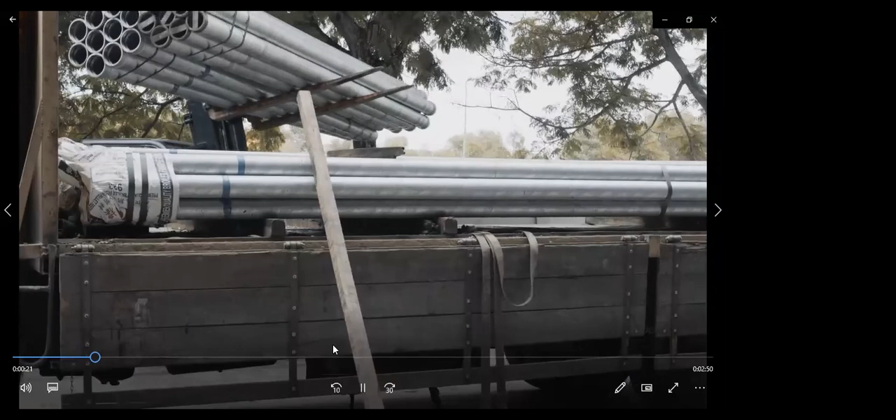As the world advances forward, standards have been rising as more sophisticated buildings are being developed. That is why we dedicate ourselves all these years to ensure that those high standards are met while providing only the best to our stakeholders here at Syarikat Logam Unitrade Sdn Bhd.

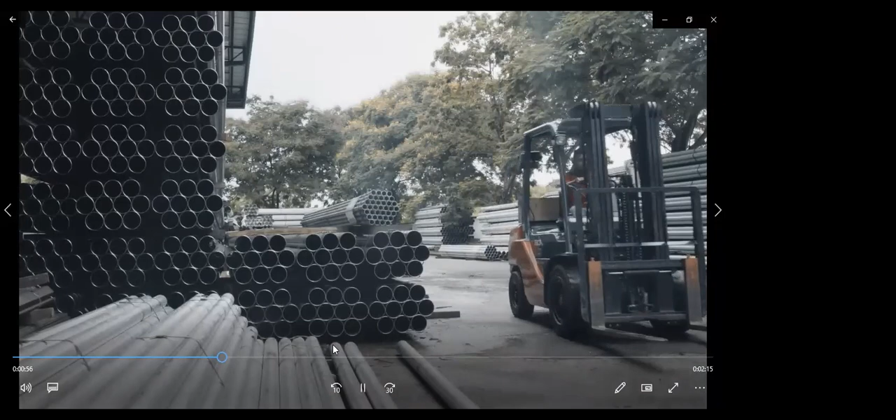Established in 1978, Syarikat Unitrade was founded by Sim Keng Cho, which later incorporated to Syarikat Logam Unitrade Sdn Bhd in 1984 as a major distributor, stockist, importer and exporter of pipes, fittings, valves, accessories, and building materials. With 40 years of hard work and dedication, the company has grown from a humble store at Jalan Ipoh to a 1-acre warehouse at Glenmarie in 1995, and now a 5-acre warehouse at Bukit Jelutong, Shah Alam today.

This would all not be possible without the endless support from our loyal customers. With the wide range of products we offer, Syarikat Logam Unitrade Sdn Bhd is now a one-stop solution center for our customers in construction, plumbing, fire protection, air conditioning, and more.

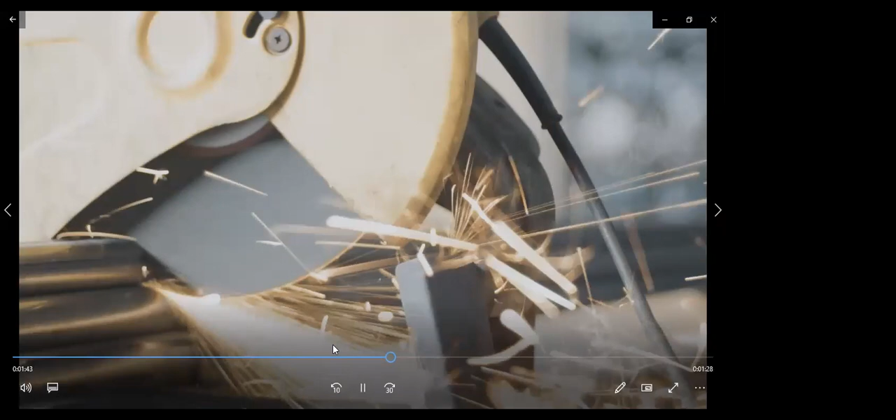To deliver confidence and reliability, we source and supply only the best quality products that meet the high standards of the industry in order to satisfy the high demands of our customers. Over the years, the materials we've supplied were used in some of today's most recognizable landmarks in the country, including KLCC, KLIA and KLIA2, Legoland, Vivacity Megamall, KL118, and many more.

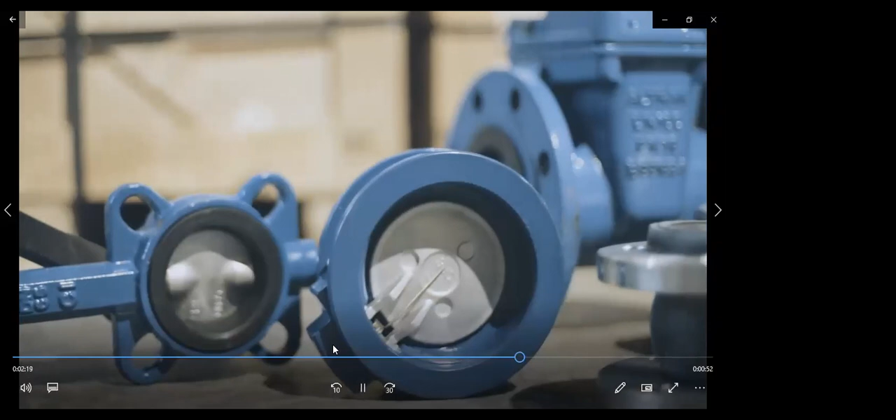Inspired to become the market leader, we have developed our range of products branded as Alfront. These products are registered both in Malaysia and China, and it is well accepted nationwide for its quality and reliability. In our inventory, we also stock and distribute some of the most renowned brands from around the world to our customers.

By combining dedication and commitment with high-quality products, the company aims to strengthen its presence nationwide and expand its reach internationally. Moving forward, we will continue to treat our customers with integrity and to provide endless support and reliability to ensure that possibilities are infinite with us at Syarikat Logam Unitrade Sdn Bhd.

Thank you, Ruben. Sorry for the minor mistakes. This is introduction to modern tech. Sorry about that. Okay, let me just get back to the screen.

Okay, I will come back to you on the website introduction again. Okay, where am I? Can you see me? Hello? Yes, yes, yes, yes.

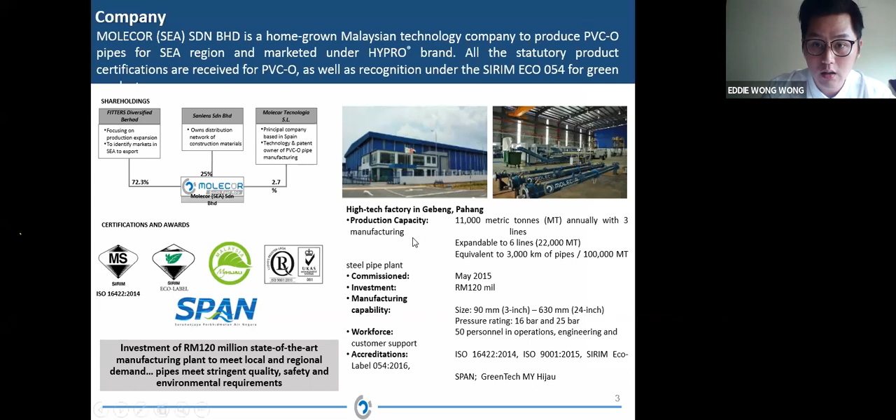As you can see, we have received awards over the years. Especially, we won the gold award during the 3rd Asian Plastic Award 2018 in the category of construction product. Besides that, we also received the SIRIM EcoLabel, MyHIJAU, SPAN, and also the ISO 9001 certification.

Here is something I'd like to emphasize, this green technology product. Molecor Southeast Asia received the MyHIJAU product mark in 2018, followed by the SIRIM EcoLabel 054 in the same year. So we have endorsement of HYPRO PVC-O as a green product, supporting the Government Green Procurement (GGP) to achieve its 20% target.

We also give the opportunity for users to take part in the Green Building Index and Green Tech Incentive, which benefits our developers and asset owners. At the moment, we are the only manufacturer to have received this MyHIJAU EcoLabel mark.

For our company project reference, Molecor has a very strong track record for infrastructure projects for piping applications in water reticulation, irrigation, wastewater and sewerage in both Malaysia and internationally. We have a total installed length of 800 kilometers in the Malaysian market, and we are actively participating in projects in Johor, Kelantan, and Negeri Sembilan.

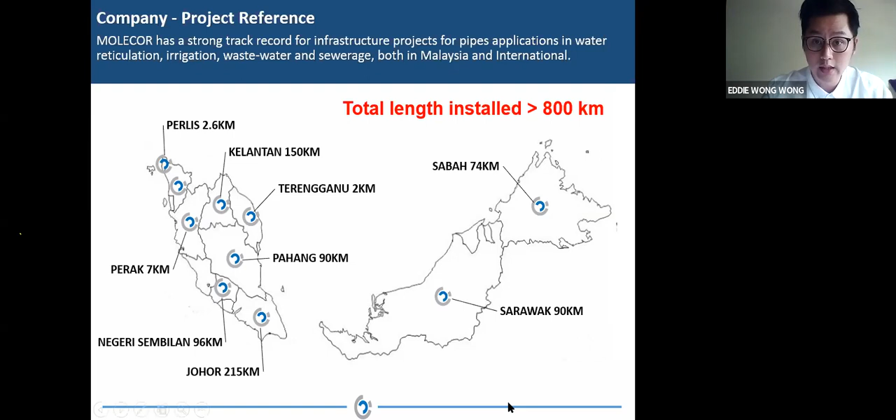For the international side, we have exported this pipe for irrigation applications to Papua New Guinea and also for housing development. So it's not only in the Malaysian market, but also in the international market, the Southeast Asia region.

This is a short video to introduce and give some idea of how our molecular orientation technology process works.

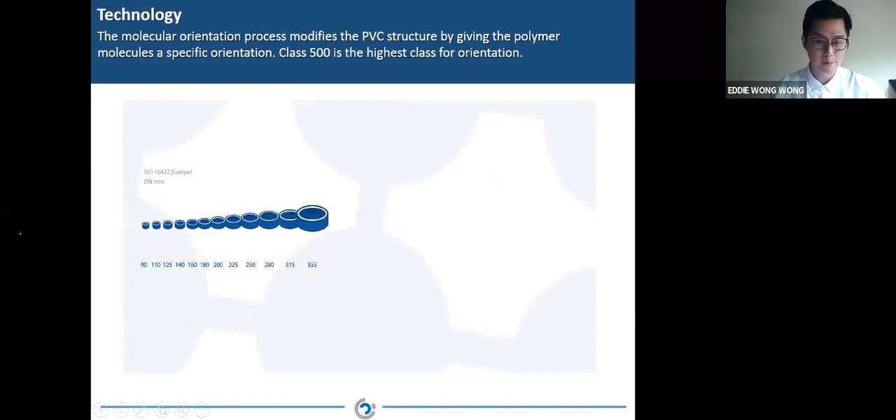Molecor has developed an exclusive technology that allows manufacturing oriented PVC pipes class 500, the highest, from DN 90mm to DN 800mm. This technology is based on the physical process of molecular orientation, which greatly enhances the PVC's physical and mechanical properties while maintaining the original polymer advantages.

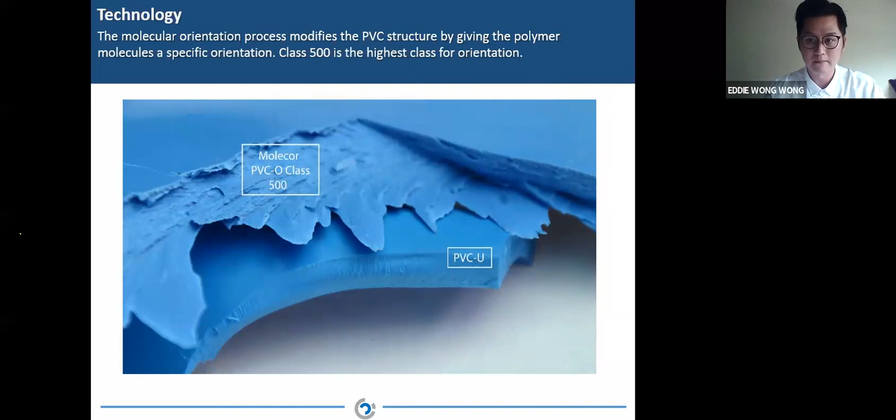When stretching PVC under certain conditions of pressure, temperature and speed, the polymer molecules are aligned from an amorphous molecular structure into the same direction as the stretching, resulting in a laminar structure. Molecor's technology enables orientation in both the hoop and axial directions, obtaining complementary benefits and improved characteristics.

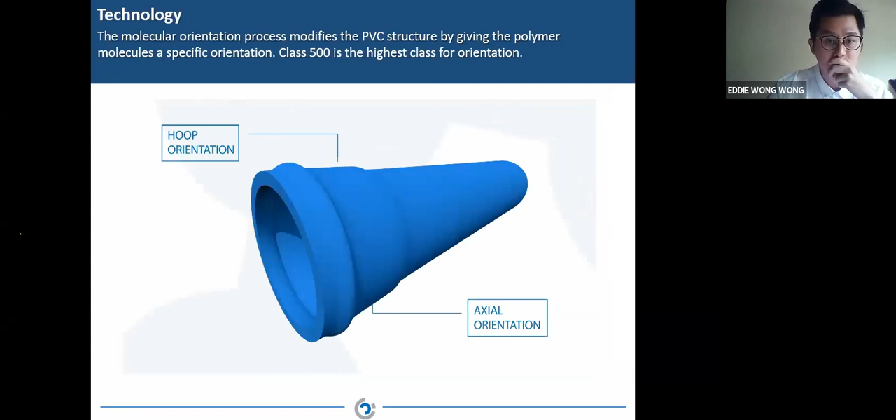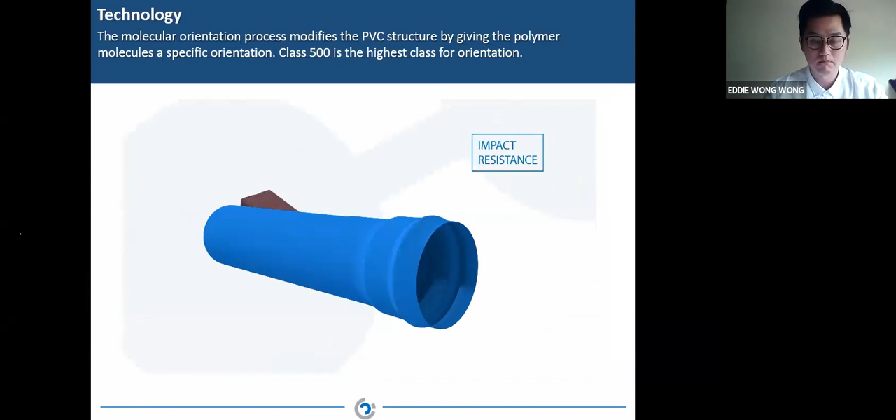We find higher hydrostatic resistance, excellent response to water hammer, unbeatable impact resistance, maximum flexibility, corrosion resistance, and increased hydraulic capacity. Besides, the pipe is highly energy efficient and environmentally friendly because of the ease of installation and the considerable savings in raw material compared to other plastic solutions.

Besides all this, the Molecor technology is a fully dry system, which means safety for workers. It is also stable, automated, flexible, and with a very distinguishing feature: the socket can be manufactured at the same time as the pipe and with the same characteristics and properties. This means that no extra machinery is needed to manufacture the socket.

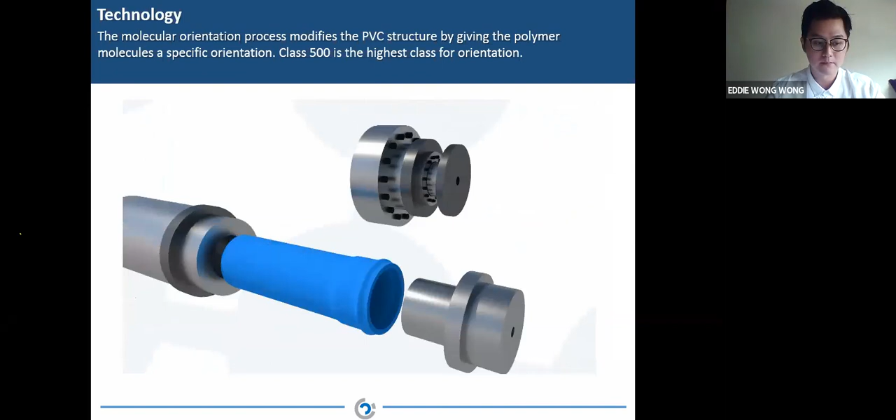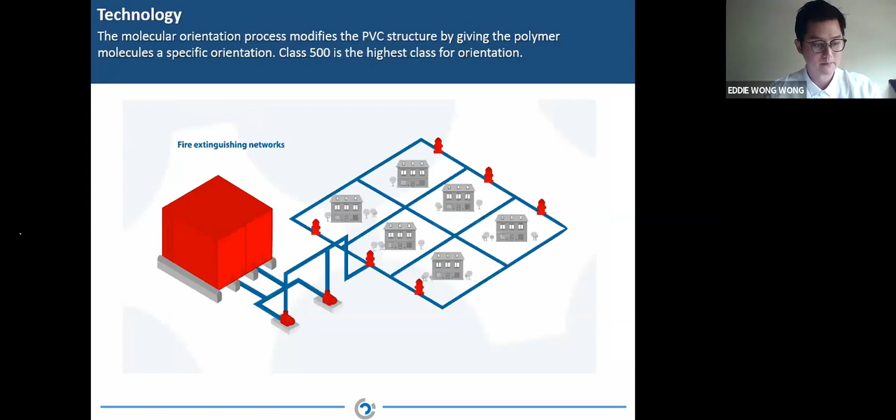The best solution for medium and high pressure water networks, irrigation systems, potable water supply, fire extinguishing networks, and pumping systems, among other uses. Molecor, orienting the future.

Here's a little recap explaining how it actually works. With our molecular orientation process, it helps to modify the PVC structure into a layer structure. As you can see from the picture, the molecular bond is randomly layered for PVC-U. After going through this molecular orientation process, it helps redirect the orientation and become a defined layer structure, transforming a random structure into a layer structure.

The picture below also shows that PVC-O pipes are layered inside, different from traditional PVC-U. This also helps enhance crack propagation resistance. So whenever external damage impact occurs, it will not go straight through into the inner pipe — it will stop layer by layer.

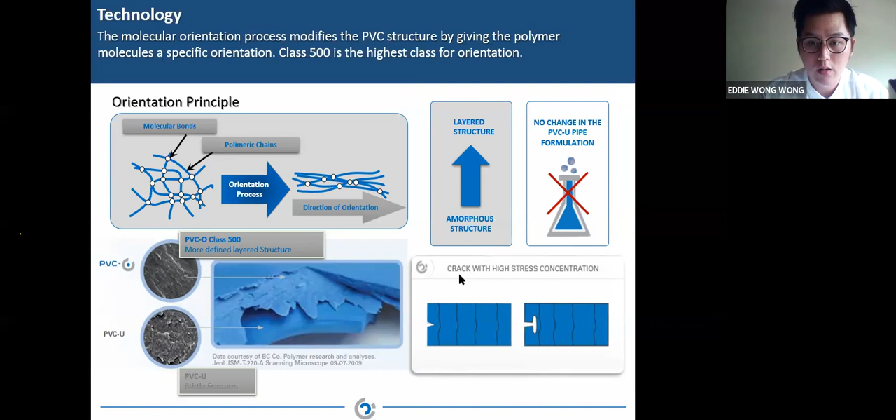With this technology, the result of PVC molecular orientation is stunning. It helps PVC-O achieve an enhanced level of impact resistance compared with PVC-U and PVC-M. As you can see, the level of impact resistance is the highest for PVC-O, level 5. Not only impact resistance, but also elasticity, strength (MRS) in both long term and short term, and modulus also show significant improvement compared with other polymer pipes.

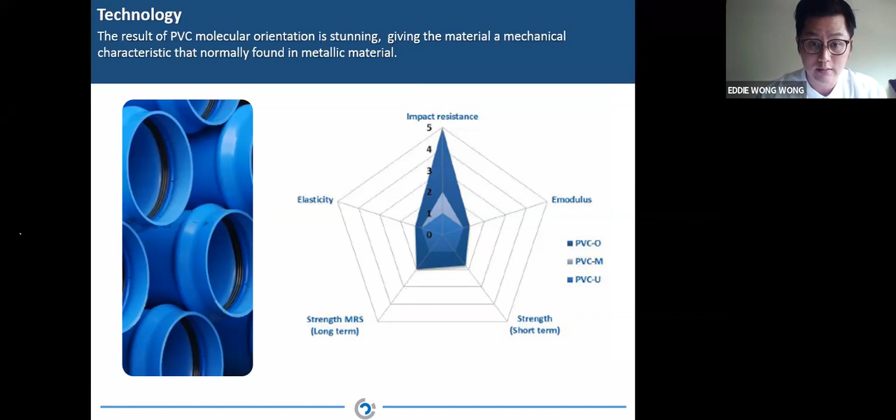PVC-O material is actually not a strange material worldwide. For example, in Australia there are 3 big manufacturers of PVC-O material. Although they use different technology, PVC-O is growing worldwide as a material for water solutions.

We produce 630mm sizes locally, and for any sizes above that we import from our technology partner, Molecor Spain, when producing at 16 bar and 25 bar pressure ratings.

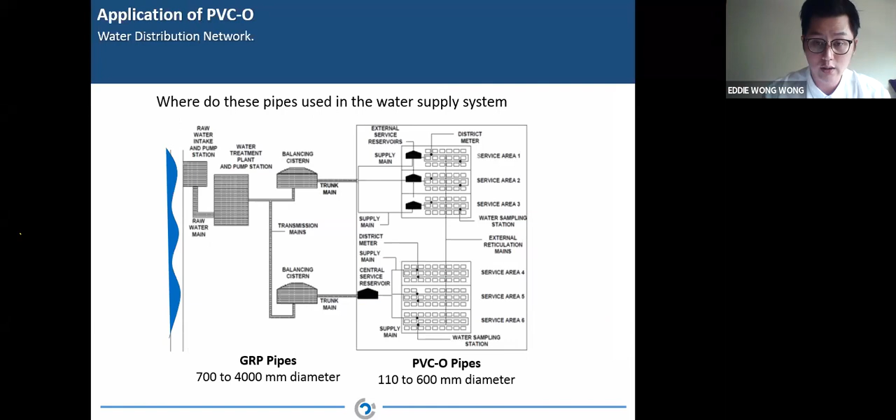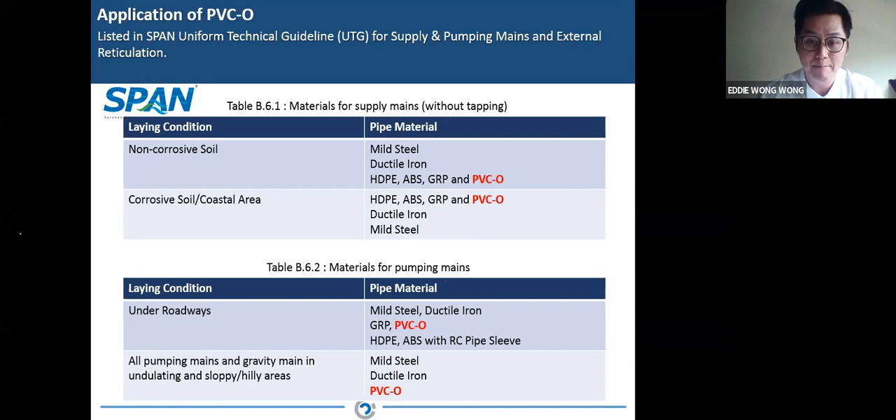In table B6.2, PVC-O material is also approved under roadway conditions with no RC pipe sleeve needed. Table B6.3 is for external reticulation pipeline material. As you can see, PVC-O is still recognized as approved material for all laying conditions, and under roadway no RC pipe sleeve is needed.

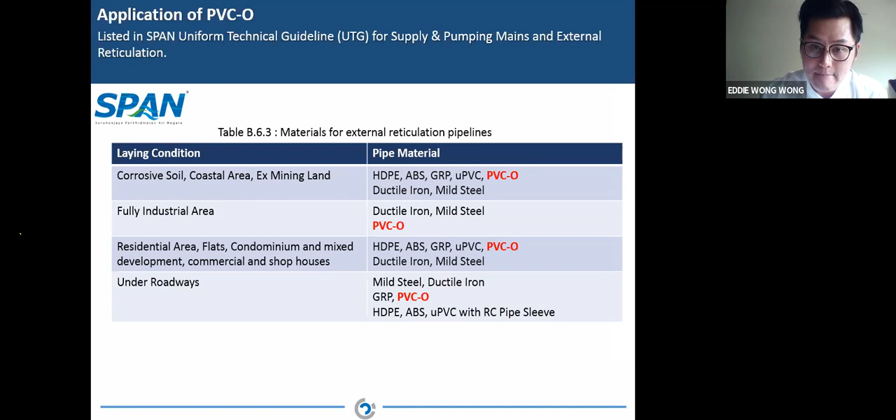There are a few points I would like to emphasize with PVC-O material - a few propositions I would like to talk about. First is the superior mechanical properties.

With this orientation process, it also helps enhance the level of extreme impact resistance and high resistance to external point load. I will show in the video later how extreme the impact resistance is, and also the high resistance to external point load.

Second point, the hydraulic performance. A good pipe should transport the maximum amount of water with the lowest energy consumption. With this molecular orientation process, the benefits are highly significant in terms of hydraulic capacity, using the lowest energy consumption to transport water.

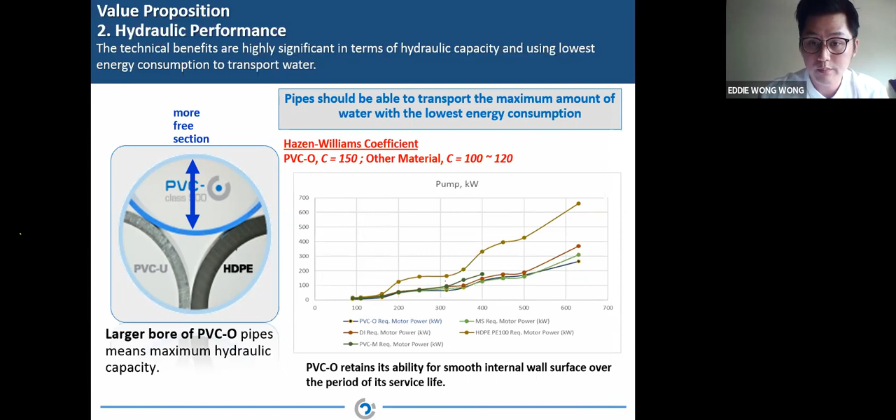The third part will be the long-term performance. As we all know, PVC-O is designed for up to 50 years of design life.

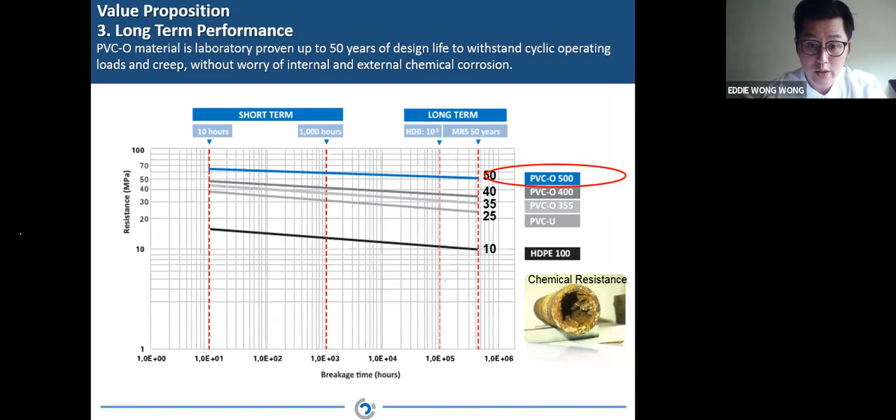With this chemical resistance - as you can see from the picture, a pipe without this chemical resistance, this will happen in a few years' time. When this happens, it costs you in maintenance and maybe pipe replacement, and increases your pumping water energy, and so on. In a further video, I will talk more about this chemical resistance.

The next point will be enhanced sustainability. During raw material extraction and production until the end of usage, we use less raw material, and all our material is lead-free and mercury-free.

During production we use less energy, and during installation it's easier for workers because of our single joint - so much easier - and with the lighter weight of the pipes, there's also cost saving on heavy machinery, so you don't have to rent heavy machinery.

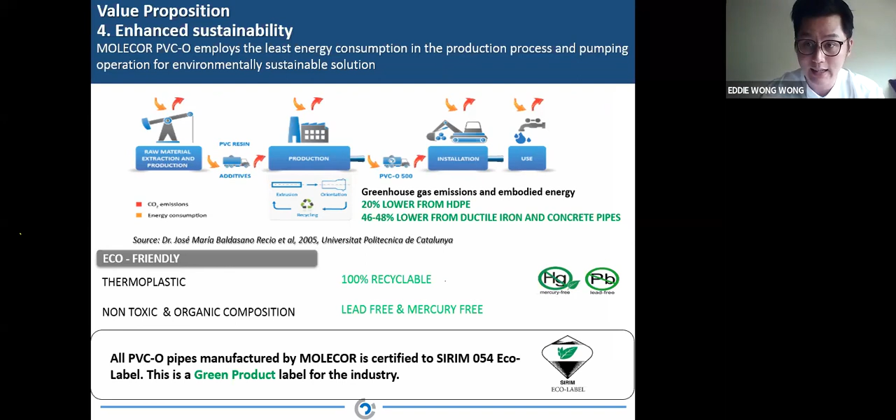Our raw material is 100% recyclable, and being lead-free and mercury-free helps - PVC-O pipe manufactured by Molecor is certified with the SIRIM 054 Eco-Label. We are the only pipe manufacturer that has received this green product label in the industry at the moment. Still, we are the only one.

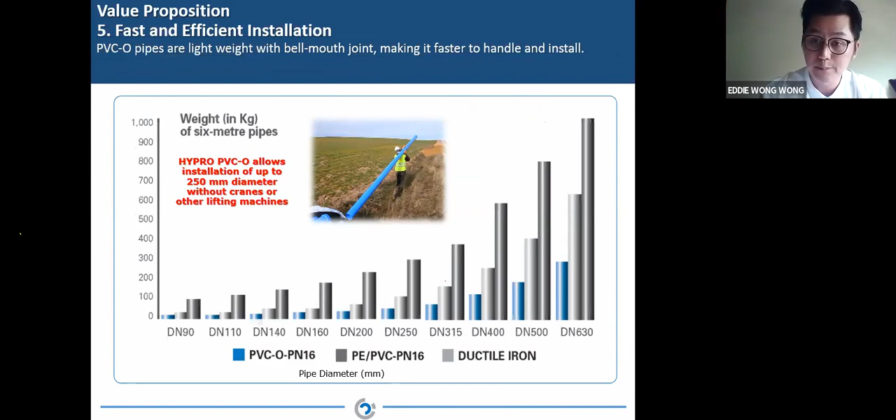So it helps save time and also save cost. This is a short video to show the installation and how it actually looks, recorded in Kuala Ketil.

So first we do trench preparations.

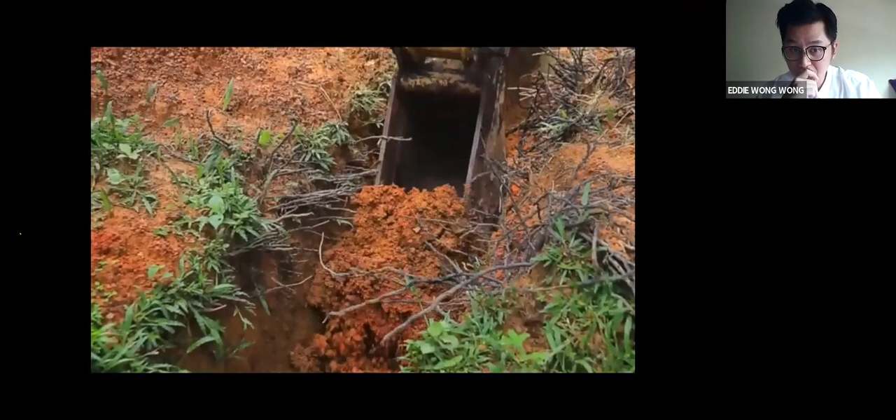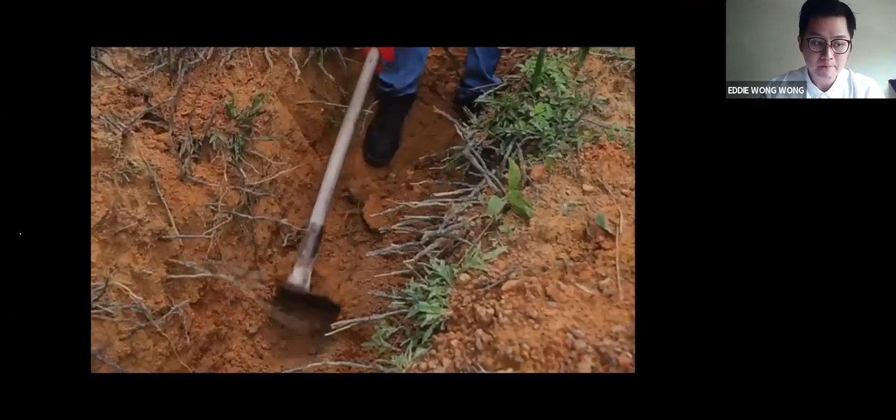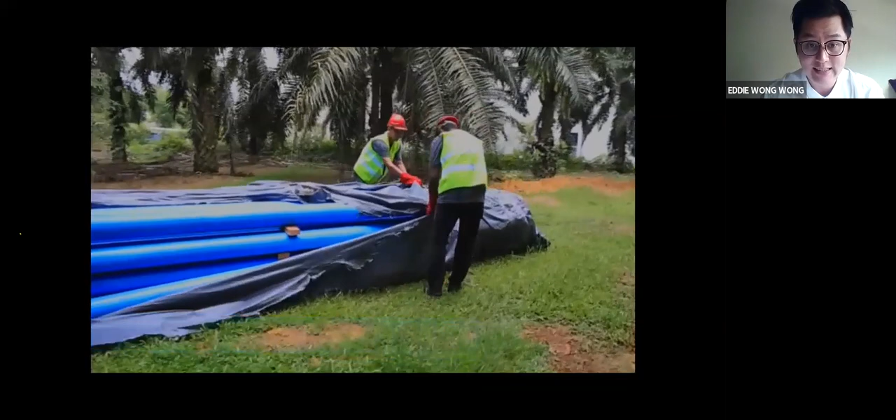This is actually how it looks when our pipe is delivered to the site. We bundle packaging with the protections and caps.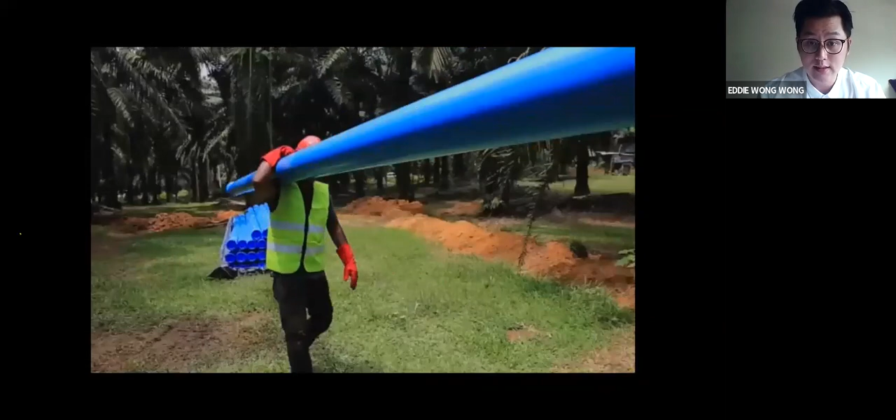For the first time, we will send a technical team to support our customer on the installation, to show the workers how the installation should be done. As you can see, this pipe can be lifted up by just one man, no lifting requirement needed.

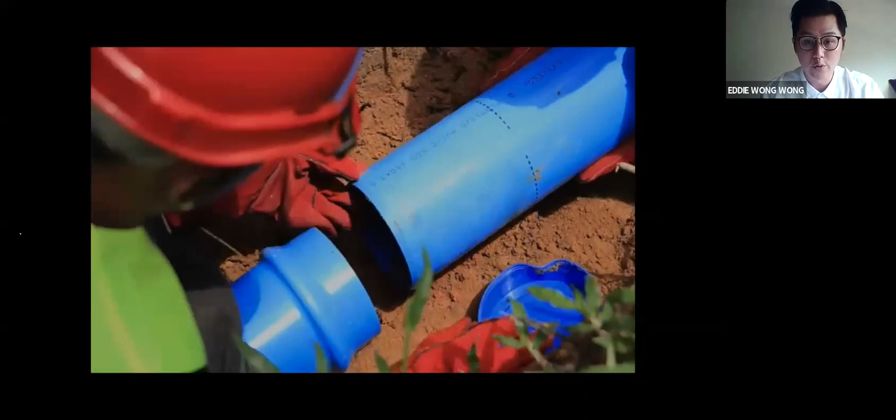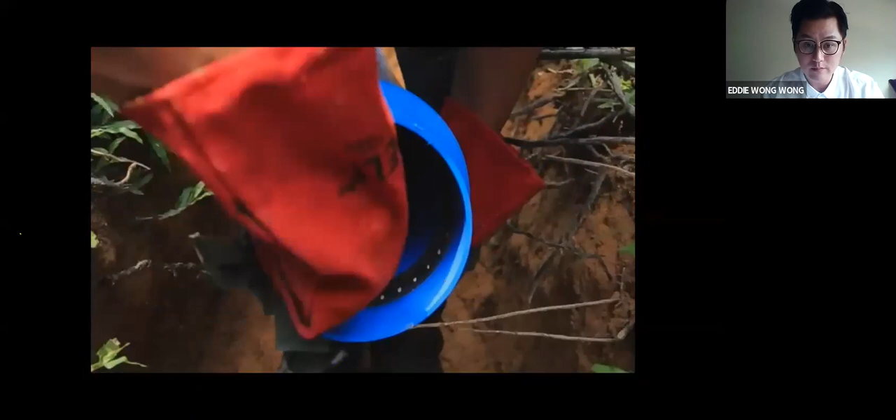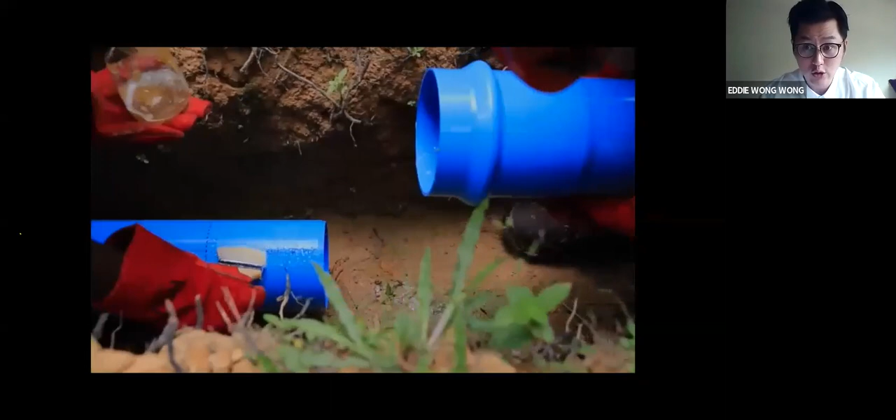This is just a lubricant, a soft soap. It's not a glue or anything like that, just a lubricant for easier installation, applied on the surface and also internally in the water pipe.

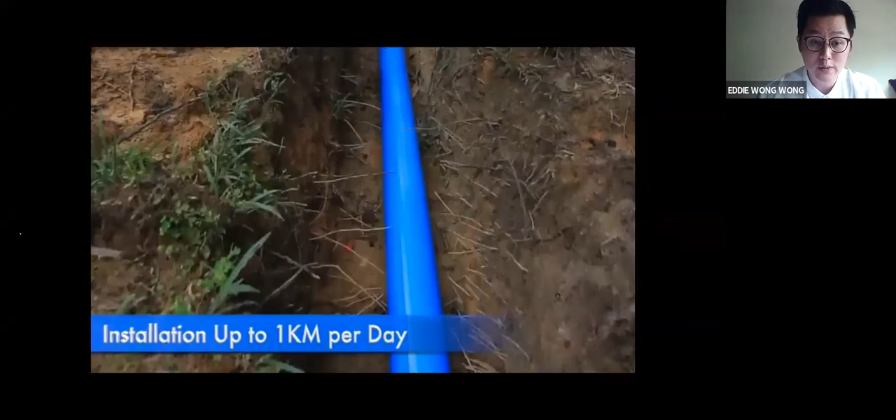For easier installation, you only need 2 people to push the pipe in up to the end mark, and that's it for installation. It's so easy, we can install 1 kilometer of pipe per day. This is an example for 500 millimeter installation pipe.

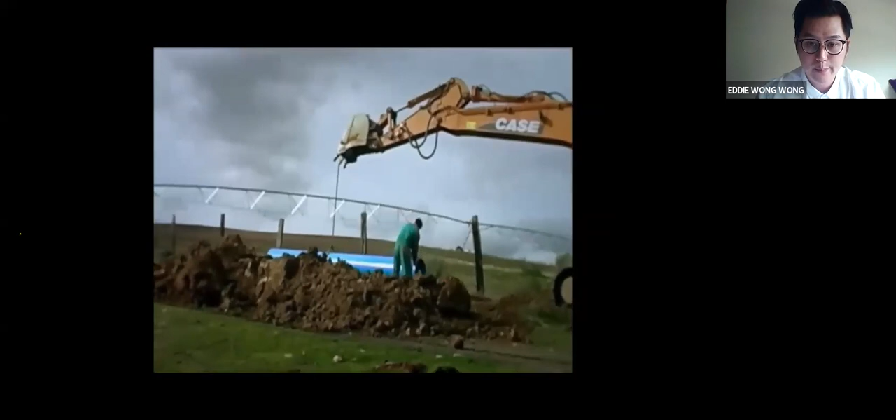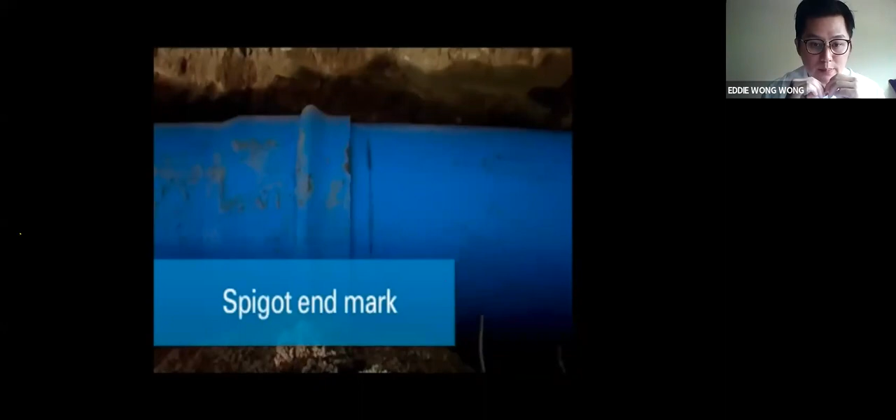Push until the end mark, and that's it for the installation. High efficiency on installation timing. This is the simple coupling part done at the site. Simple coupling, cut the pipes.

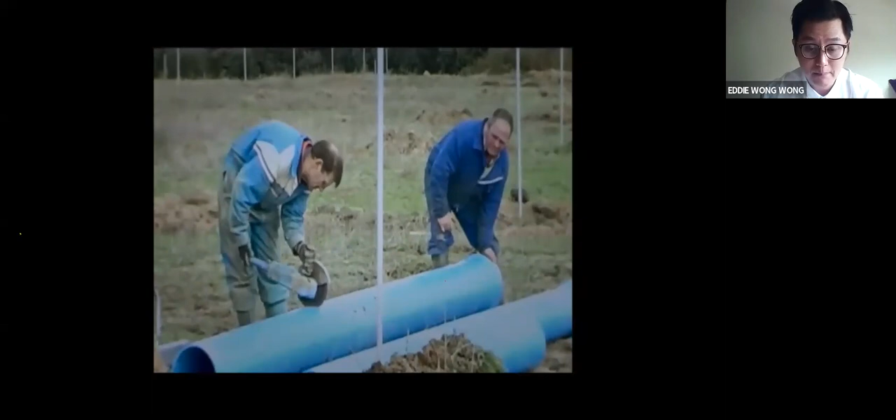This shows the maximum flexibility of our PVC-O pipes. They are compatible with many other fittings, no special fitting required, also compatible with PVC-U parts as well.

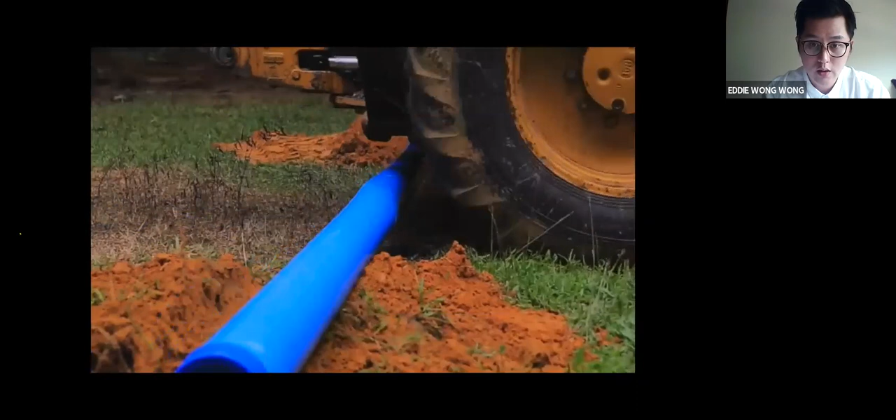Here is a video to show the high resistance effect. Before the pandemic, we also did this experiment in our factory to show clients how strong our HYPRO PVC-O pipe is.

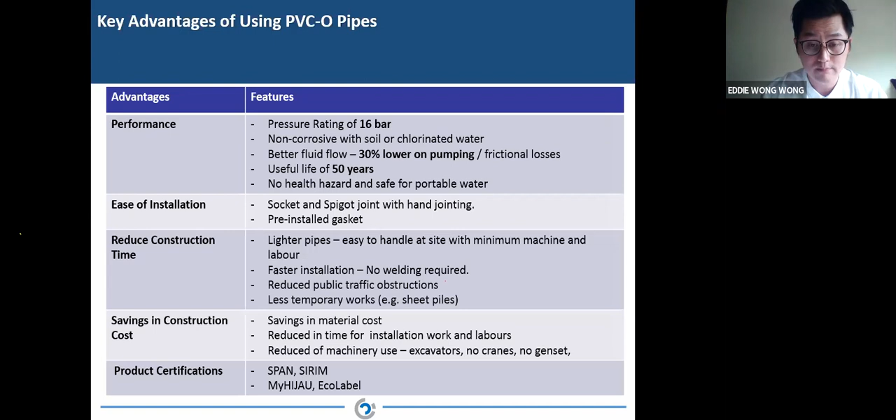With this project, we received product certification from SIRIM, MyHIJAU, and EcoLabel. These are the related parties everyone knows: water authorities, of course Air Selangor; the developer was Pencala Jaya; the consultant, YNY Consulting Engineer; Ideal Range was the main contractor; and of course the pipe supplier was us, Molecor Southeast Asia Sdn Bhd.

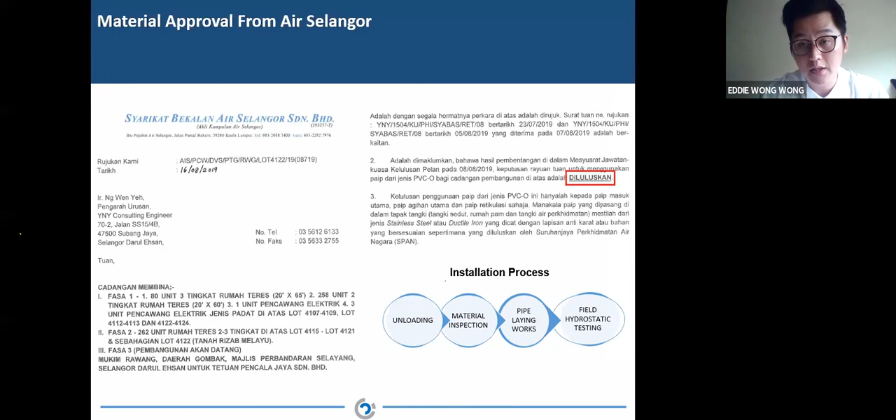These are the material approvals from Air Selangor. As you can see from the installation process, from unloading, material inspection, pipe laying works, until the final field hydrostatic testing, it only took up to 3 months to complete the whole project. It is so fast, and this is the material approval from Air Selangor.

Here are some pictures of the material inspection at site. This inspection included Air Selangor, our respective client, consultant, and main contractor. The objective was physical material inspection and measurement of key parameters as per specifications.

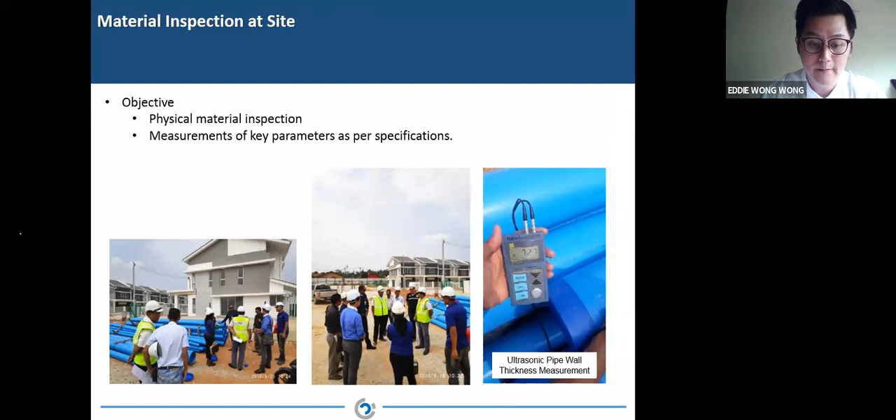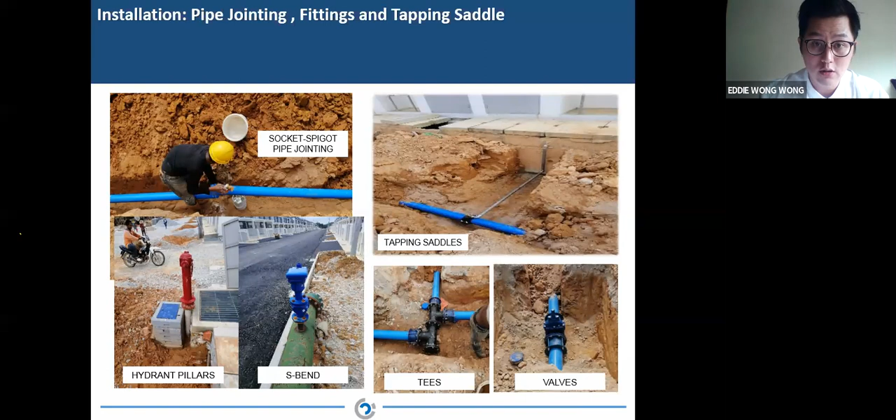This is the installation of the pipe jointing. As mentioned, there are no special fittings, these are all commonly used in the market: socket, spigot joint, valve, T, tapping saddle, S-bend. Also shown are external reticulations with sizes DN315, open cut on public roads.

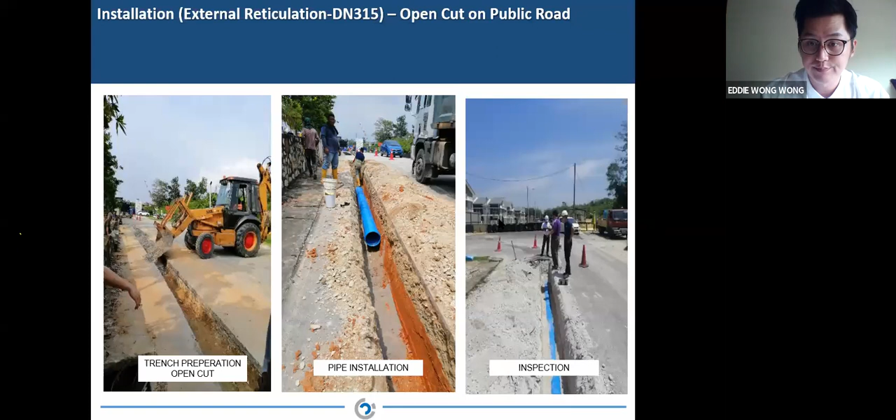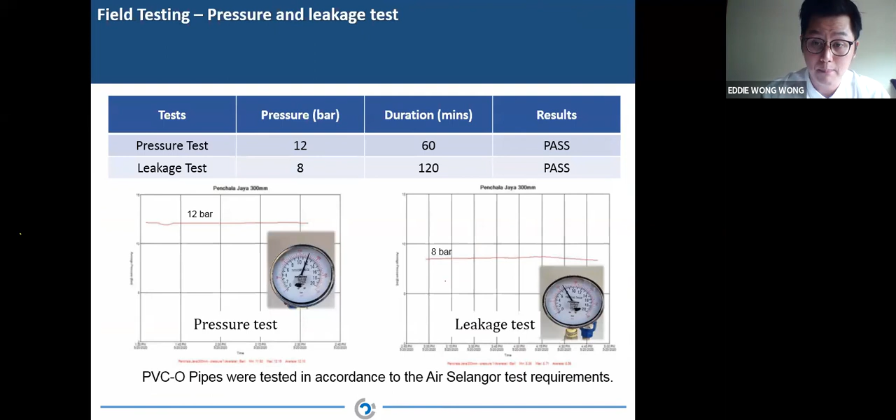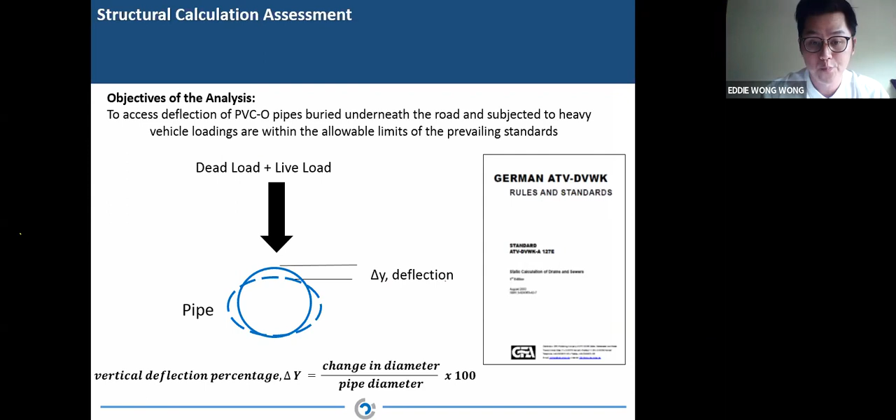This calculation assessment includes an internal working pressure of 4 bar, with a maximum trench depth of 1.3 meters, and live loads of 26 ton and 60 ton axial load from a wheel of vehicle HT26 and HT60. Here are the results for this calculation assessment.

Under the static calculation, the vertical deflection of PVC-O pipes is less than the allowable limit of 5%, whereby all the results still pass for using PVC-O, no matter the vehicle loading type, HT26 or HT60. All results pass.

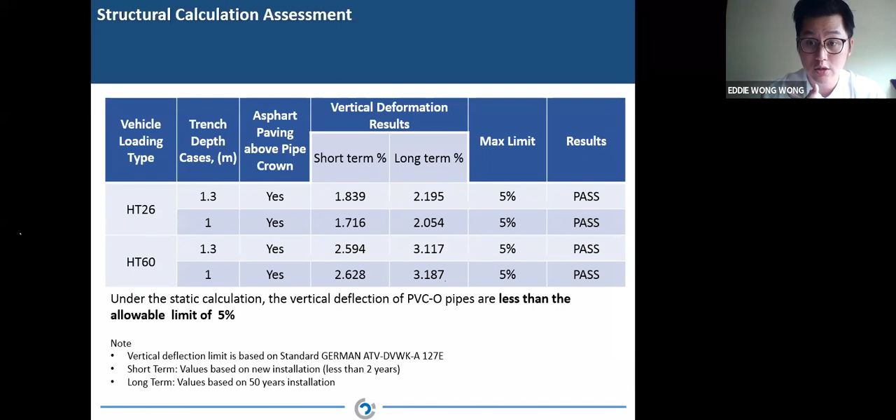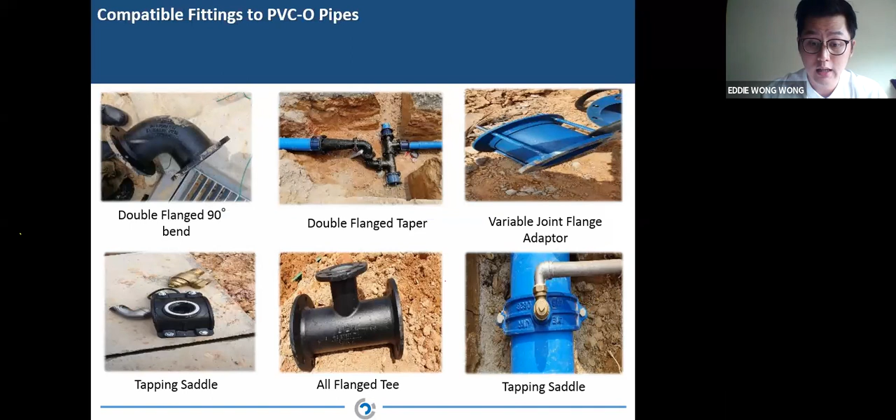These are the compatible fittings for PVC-O pipe that we commonly use in our project, in our installation site.

We also did a bit of project cost comparison, comparing material with MSCL and also HDPE. As you can see, in total cost savings, we actually save up 16% compared with MSCL, and 22% with HDPE.

The total cost savings come from labor and heavy machinery, because we save on renting all the excavators and so on. We also save on total installation duration. As you can see, we only used 27 days to finish all this installation, whereas using MSCL you'd spend 40 days, and HDPE is 70 days. So it's 160% faster comparing PVC-O and HDPE in completion day.

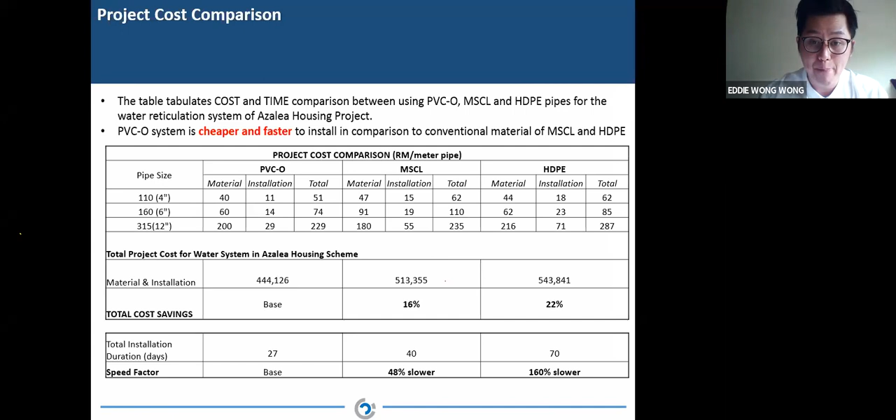So in the end, this case study actually benefits a few parties. By using PVC-O, it benefits the water company first, because of hydraulic performance - we transport more water with lesser water pump energy consumption. Secondly, with long-term performance, because we are chemical resistant and designed for up to 50 years design life using PVC-O pipes, and also cost effective.

Secondly, it benefits the installer, because it's so easy to install and saves a lot of time and cost on heavy machines. Lastly, it benefits the end user, because all our materials are eco-friendly, 100% environmentally friendly use, so we ensure the water quality. This is a big benefit to the end user.

So this is the end of my part. Is there anybody else who would like to raise up a question to ask? It's Q&A time for questions.

Sorry, I couldn't hear you, Goh. Can you hear me now? Yes, I can hear you now. Okay, thank you Eddie, thank you for your presentation. Now, while you were presenting, there were a list of questions asked in the chat group. I think we should share it so everybody will know what is going on, right? Yeah sure, okay.

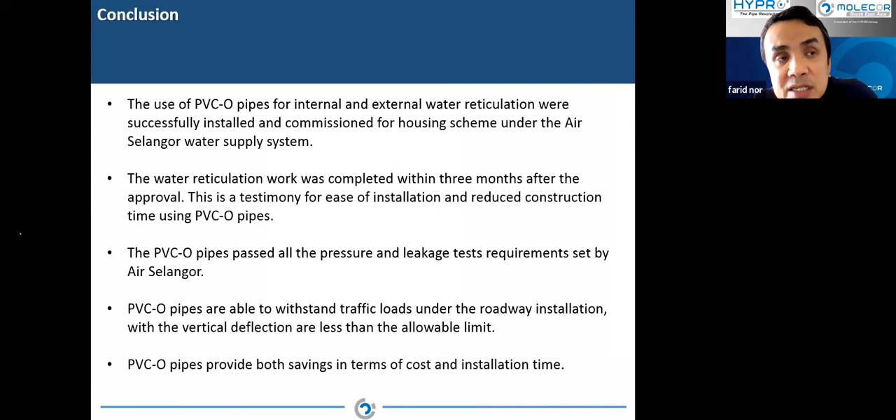Maybe they are referring to, if you see the video that Eddie, if you watch the installation video earlier, actually you can see the presence of rubber seal. Our rubber seal is from Trelleborg. It's actually PN25 rated, although the pipe is PN16, but we installed PN25 rated seal. The one that actually helps the insertion is just to apply the soft soap, which Molecor will provide together during the installation. But yes, we use rubber seal. The pipe supplied from the factory is already fitted with the rubber seal pre-installed at the factory.

Correct me if I'm wrong, but I think the question may be about cut pipes at site, where maybe the question is to ask whether PVC-O pipe can be used with flange joint and other application and jointing methods besides rubber seal at site, right? Nabiha, you get my question? If you cut the pipe, the pipe will be plain end, so you need to actually use joint, use fittings applicable to your application. Correct, whether you wanted to connect to the flange type or whatever type of material. So if you have further questions on the compatible fitting, I will happily assist you guys later. Yes, thank you.

Okay, there's another one. We are facing a tapping fitting problem for communication pipe, especially 50mm diameter for commercial tapping. Instead of double tapping, which is implemented in Klang Valley areas, are there any other options to overcome this?

Okay, back to the previous question about totally without rubber seal on the jointing. One more thing I would like to add is actually the pipe itself - if you cut the pipe on site, you need to use a suitable fitting for whatever application that you need. But if you are referring to other types of jointing, meaning welding or butt fusion or whatever it is, it's not applicable. We are only mechanical jointing. PVC-O can be done with mechanical jointing.

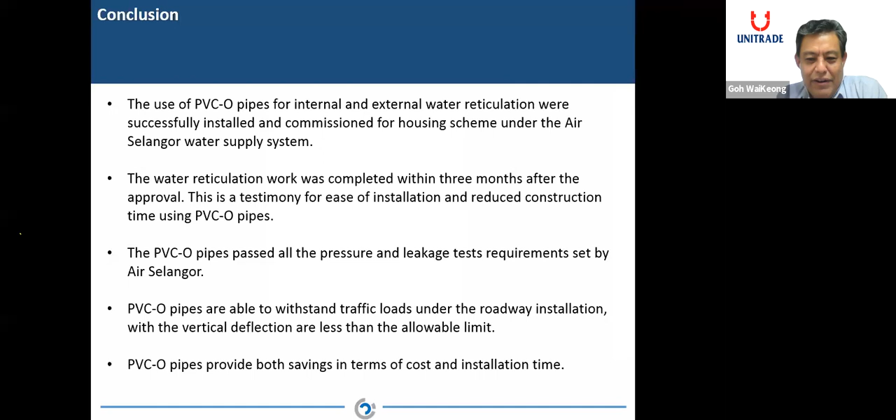Sorry, Mr. Goh, I want to add a bit on the last question about bending. The answer by my colleague was referring to the joint, but actually at the body, the rule of thumb is the bending curvature is 200 times the diameter of the pipe. If I'm not mistaken, we have a table in our manual showing the allowable bending for the body. For example, for the 6-inch, the radius of curvature for the bending is about 27 meters.

Yes, thank you Farid, you've explained clearly—this is not the joint, not the socket joint deflection, but the body of the pipe. Now, as mentioned earlier, on Unitrade side we do have stock of fittings, and we are also carrying all the fittings that have been tested together with Molecor for various sizes, tested by them for use with the PVC-O pipe.

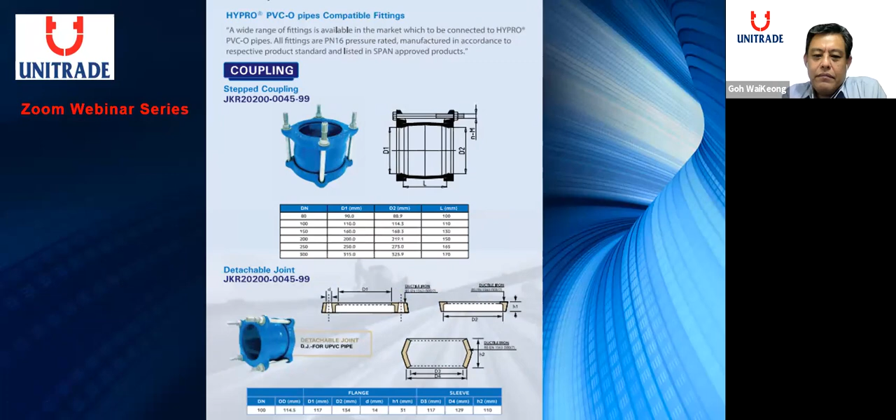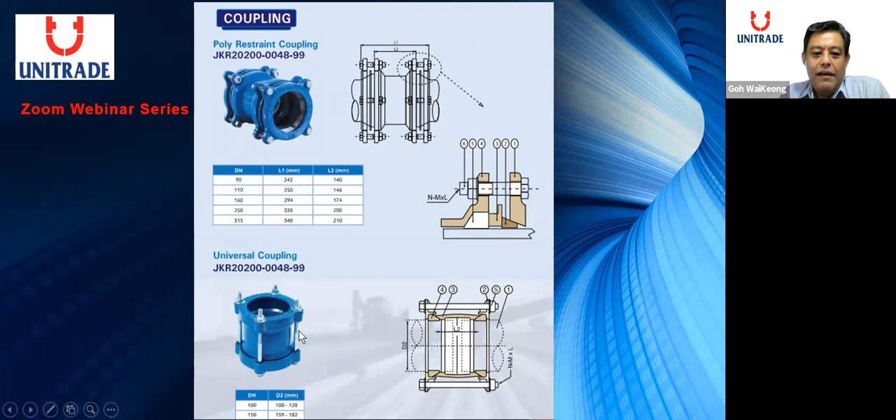So I'll just roughly bring you through what we have. As you can see, these are the couplings, detachable joints, poly restraint couplings—this is when you cut both ends as spigot and want to join it—coupling, universal coupling with other sizes of material.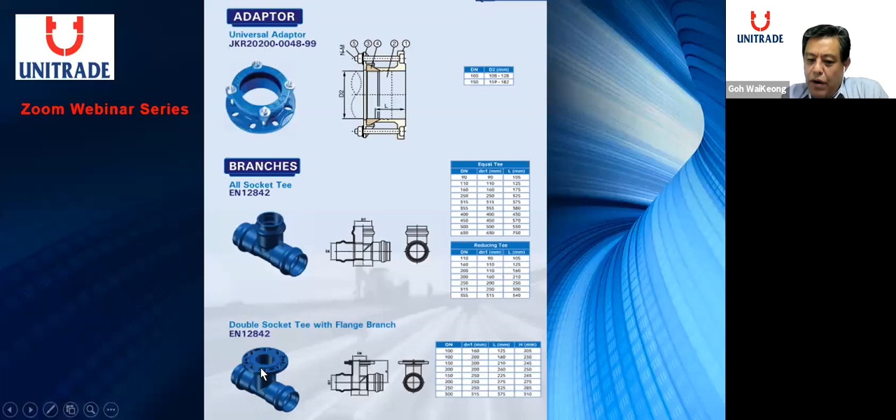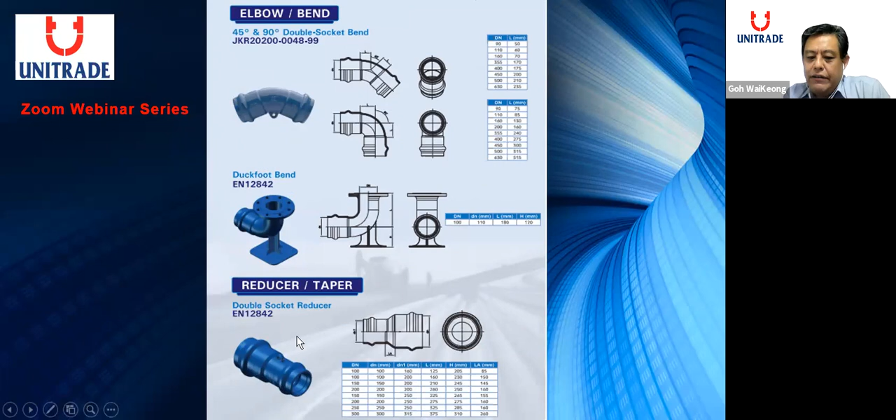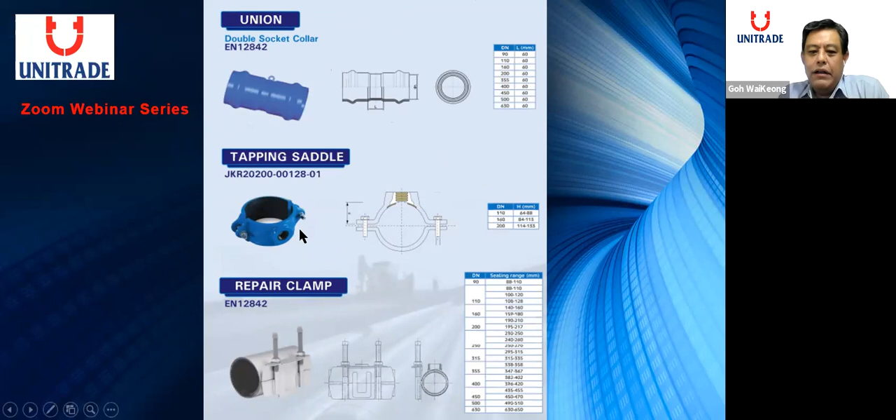These are the other universal adapter branches, all socket tee, socket with flange branch, elbow and bends, even with duckfoot bend, reducer taper, union, and even the tapping saddle used to tap from commercial pipes. This is also the repair clamps in case of any breakage.

So as the master distributor of PVC-O pipes for Malaysia, we do carry and distribute the fittings required to be used together with PVC-O pipes. I hope that answered the question.

Now, is there any further question? Any more questions from the floor?

One more thing—we hope that with the understanding of the PVC-O pipe existence in the market now, you'll take the opportunity to reconsider changing materials in your project for cost-saving purposes, because we are willing to work with you together to help save costs in difficult times like this, so we can move ahead together. So, any more questions?

Farid, would you like to have a few more words?

No, actually, thank you very much everyone for spending the Friday afternoon to listen to our presentation. I hope there's so much we can share in this particular session, but we do hope that, like what Mr. Goh mentioned, if you have any specific project you want to discuss with us, please talk to Unitrade or any one of us. We are more than willing to help and do conversion. We have all the details you need for the pipe specification. Okay, I think that's all, thank you.